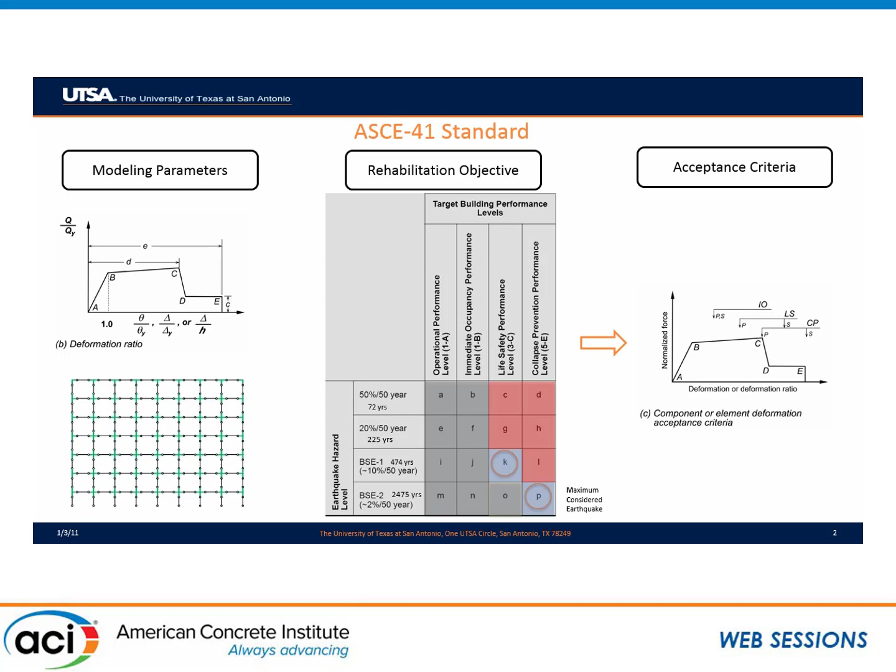We wanted to evaluate that, and the one methodology that is out there to evaluate seismic codes is FEMA P695. It's really not meant for rehabilitation, but it is a methodology that would allow us to approach this in a more objective and statistical fashion, because you're not doing it with a single ground motion. You have a suite of ground motions, and you can compare the results from near fault and far fault ground motion sets.

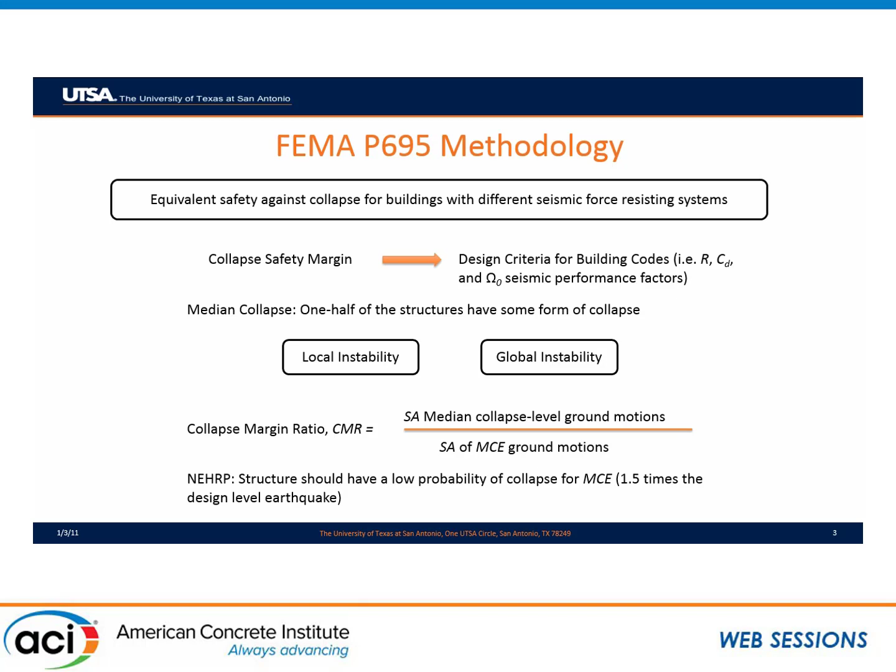Through this methodology, which is very different from ASCE-41, you subject your structure to a suite of ground motions. You figure out what ground motion causes collapse, and that gives you an idea of the collapse margin ratio for that particular structure. So we wanted to ask ourselves: if we take a building and model it using ASCE-41 methodologies, and then evaluate it with FEMA P695, what will that tell us about the probability of collapse of that building?

The natural choice was the Van Nuys Holiday Inn building, for a number of reasons. It's been instrumented, and there's a wide range of records for different intensity levels of shaking. It's advantageous because it has columns, spandrel beams in the perimeter frames, and slab-column connections in the interior frames. Our interest was in evaluating the system and how the nonlinearity is adjudicated between the different types of elements, so it was actually great that this building had many different types of elements in it.

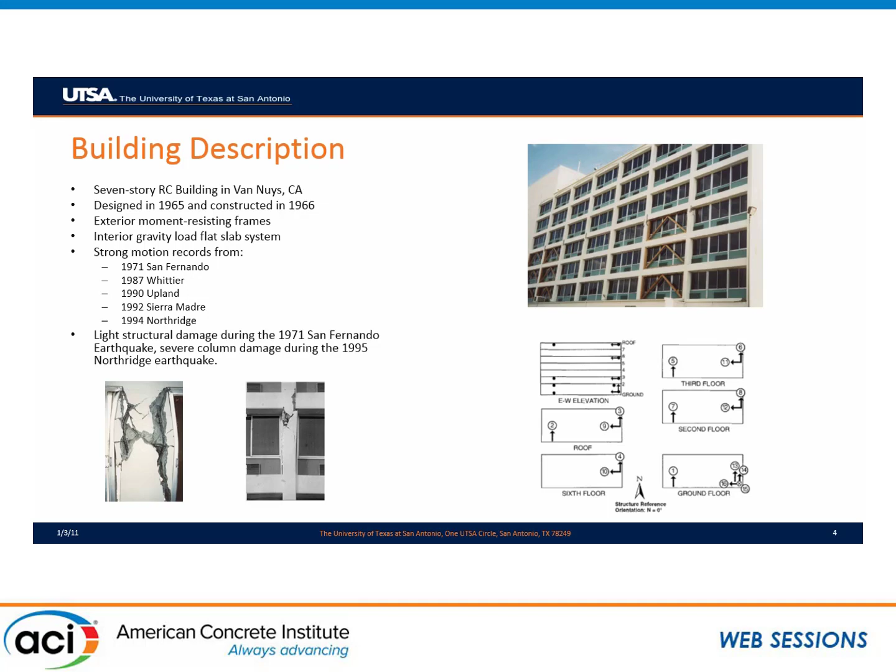As I was mentioning, today I'm just going to present results for the east-west direction, shown there in orange. As I said, the exterior frames have spandrel beams and columns, the interior frames have slab-column connections, and the interior of the building really is meant for gravity.

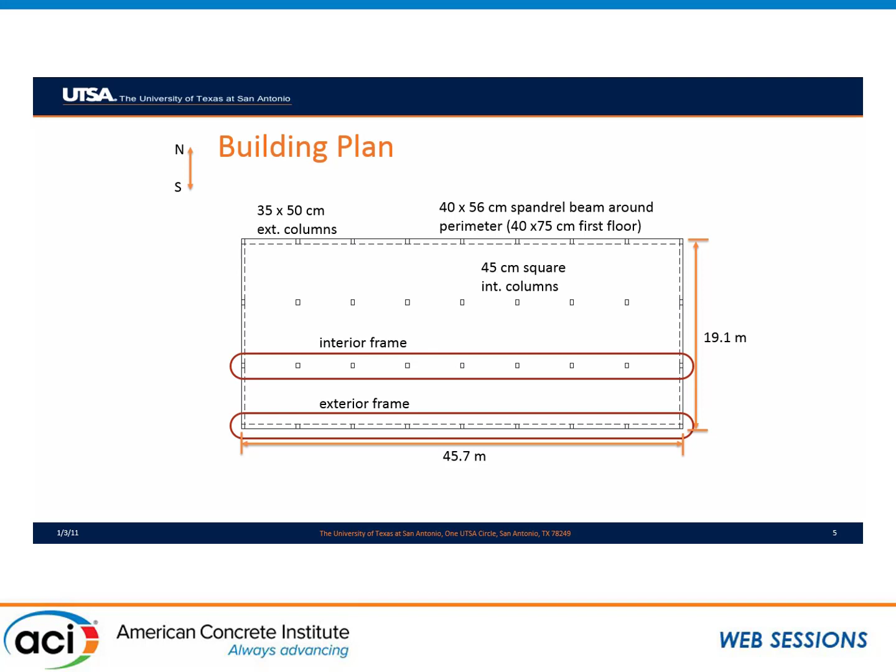In the results I'm presenting today, we're just taking advantage of symmetry and showing the results for two frames: the interior frame, which consists essentially of slab-column connections, and the exterior frame, which is a spandrel and column frame.

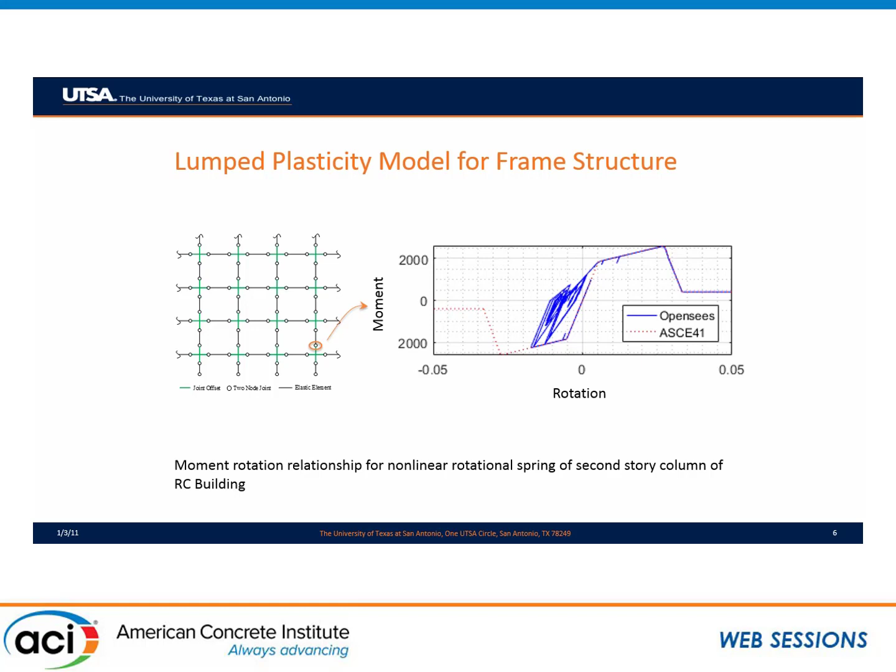So we used a zero-length plastic hinge model, in which we assign plastic hinges for columns and beams and slab columns, following the recommendations for modeling parameters in ASCE-41. The figure on the right shows a typical result from a nonlinear analysis simulation, where the red curve shows the envelope built using the ASCE-41 provisions, and the blue shows what the OpenSees analysis would indicate for a typical run following the simulation or the envelope curve.

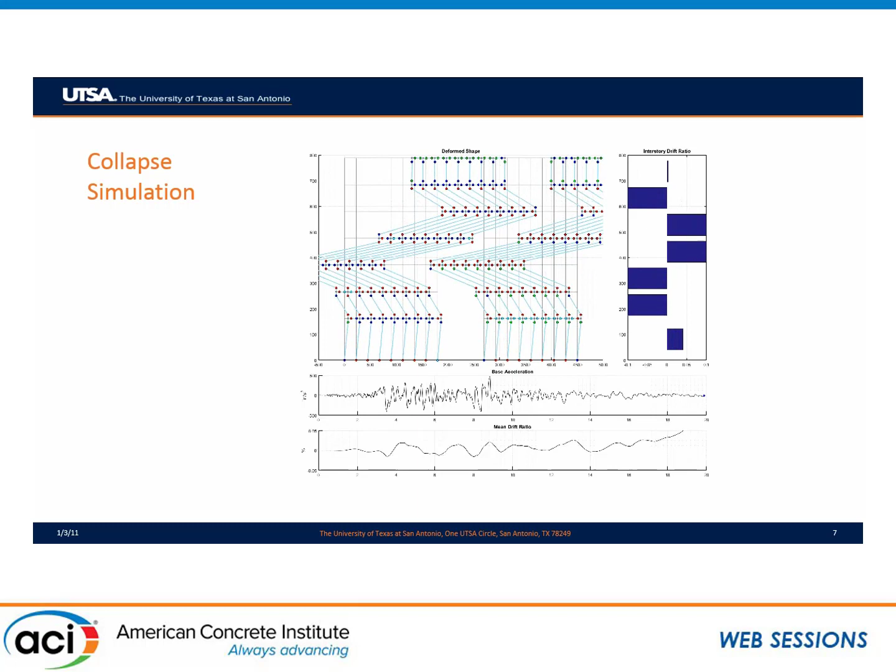Having done that, we did thousands of nonlinear analysis simulations. We tracked in each one - the hinges have different colors, similar to what Laura and Sun have shown - color-coded to show the level of damage: red is most severe, green is least severe. This particular simulation has been run to the point where the building collapses due to lateral instability. We do these types of simulations all the way up to where we reach this point, and we end up with a wealth of information for each of the earthquake ground motions that we run this for.

So as I was mentioning, we have a suite of 44 ground motions. Those ground motions we scale to MCE according to the P695 procedure. Fortunately for us, the MCE is about 1 G for the site of the building, so that makes the numbers really easy to interpret after the fact.

And for each of those earthquake ground motions, we do an incremental dynamic analysis where we extract the condition of every hinge for each of the nonlinear simulations.

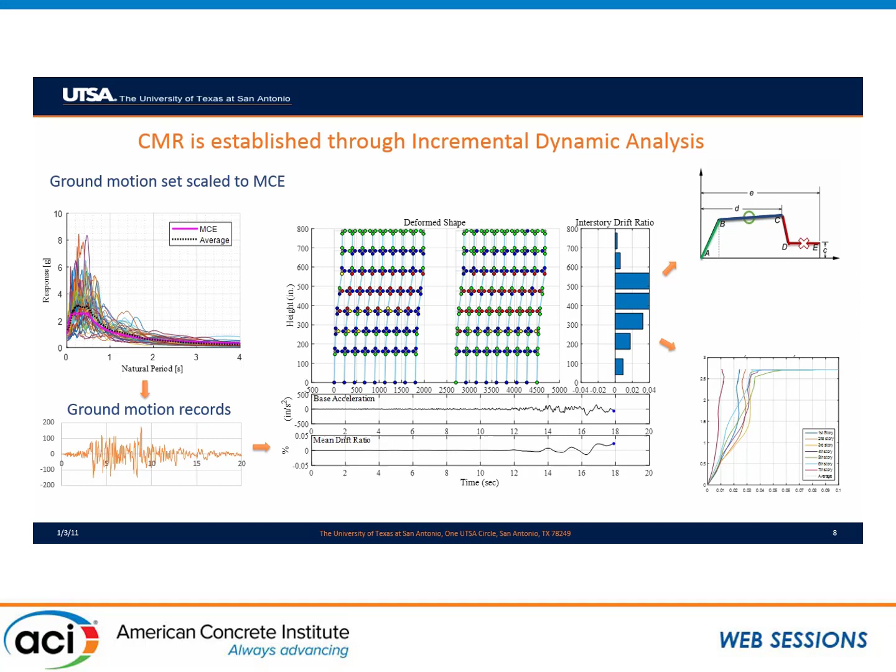Typically, you would end up with curves like these. This is a very brittle building, so you would have a fairly stiff response until the instability hits the building. The columns or the slab column connections are very brittle, and so you get all of a sudden a very flat response. And actually, that's a part that it is quite hard to simulate. It took us a lot of time to be able to get to that point.

So when we look at the results, again, this is done in a statistical way. We aggregated all these analyses to develop fragility curves.

And so when we look at the overall response of the building in terms of lateral instability, and this is a somewhat flawed analysis, because what we do is we allow elements to remain past the point where they lose axial capacity. They just keep going on toward the right with zero stiffness.

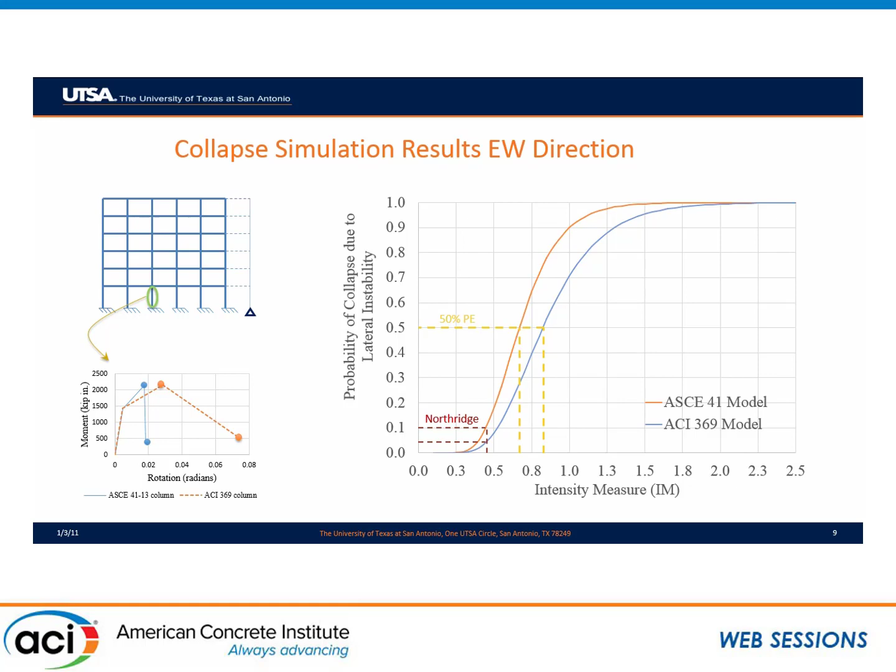On the red side is what we see with Northridge. I think these curves are interesting in of itself because it gives an idea of what these codes are saying is the probability of collapse of the building. And what I would like to remark about Northridge is these simulations tell us that the probability of collapse under the Northridge earthquake for this building are fairly low, or a ground motion with the intensity of the Northridge earthquake.

We looked at the same comparison in terms of acceptance criteria. This is a more restrictive evaluation because acceptance criteria are tied to element behavior, so you can get collapse of the building because one of the columns cannot carry axial load anymore.

In brittle buildings like the Holiday Inn, this is going to happen before the building reaches lateral instability. So you see the probabilities of collapse drop, and so whereas before we were talking about 75% or 85% of MCE to reach a 50% probability of exceedance, here these are much lower. They're in the range of the 50 and 60%.

We see the same pattern though when we look at acceptance criteria for columns, is that when we change from 13 to 17, the intensity measures associated with collapse went up, or the probabilities of exceeding went down. The building is less likely to collapse due to column failure under the 17 provisions, than under the 13 provisions.

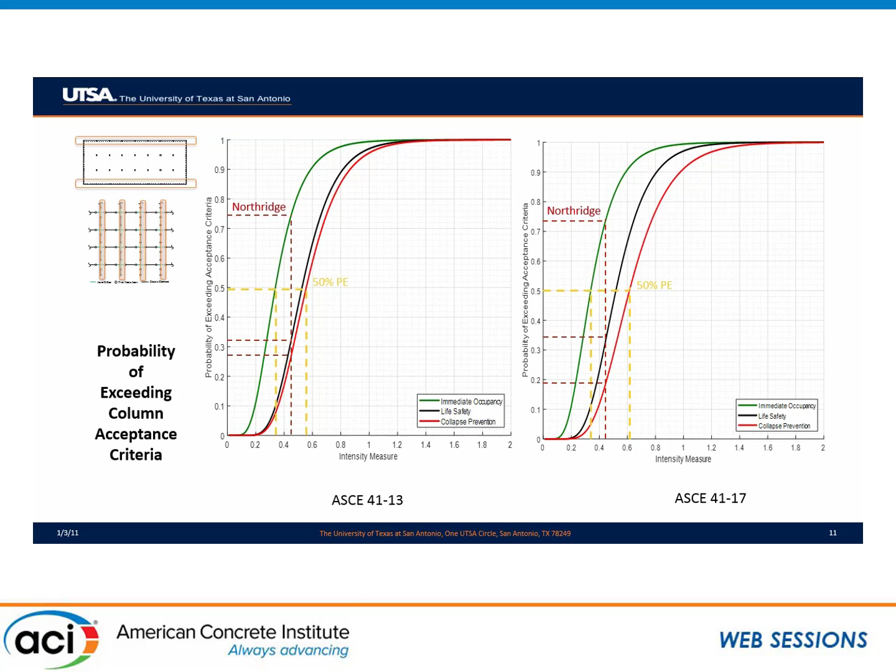The one slide that really got our attention is, we get column acceptance criteria. Let me just cut to the chase. Is this one.

This shows a comparison between what happens in the columns versus what happened in the beams. So the graph on the left, this is again in terms of acceptance criteria, shows fragility curves for the 13 and 17 editions of ASCE-41. And so our columns move slightly to the right, meaning the larger deformation capacity of the columns meant that if we judge the building on the basis of the columns, then things got better, got slightly better.

We're still at about 60% of MCE, so it would mean that for the Northridge earthquake, we were really close to collapse, but not quite there, which is about right for this building. I think that means the ASCE-41 is providing a very decent assessment of what's happening in the building.

Now, what's somewhat alarming to us is the fact that if you look at the beams, the curves went in the other direction and moved over to the left. And so that means the probability of reaching severely damaged states in the beams went up as a result of the change in the provisions.

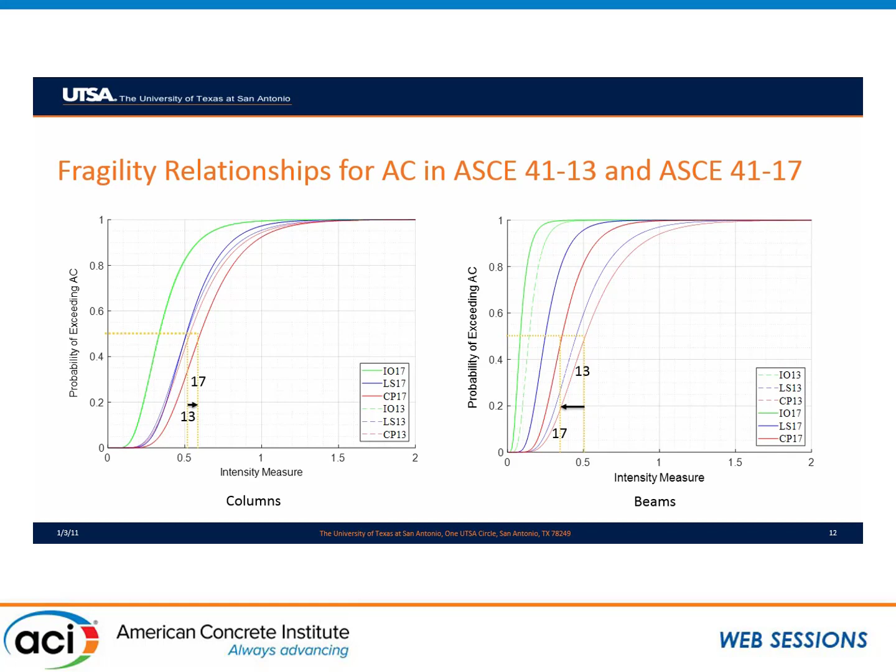We reallocated the damage from the columns to the beams, and the beams are not that important, but perhaps we should all be most concerned about the slab-column connections in the interior, which, if you make your columns stronger, then your slab-column connections are the ones that are going to begin to control the collapse capacity of the building. Having seen that, this is one of the efforts we're going to talk about later when we discuss ASCE-41 and what we're doing in the next code cycle.

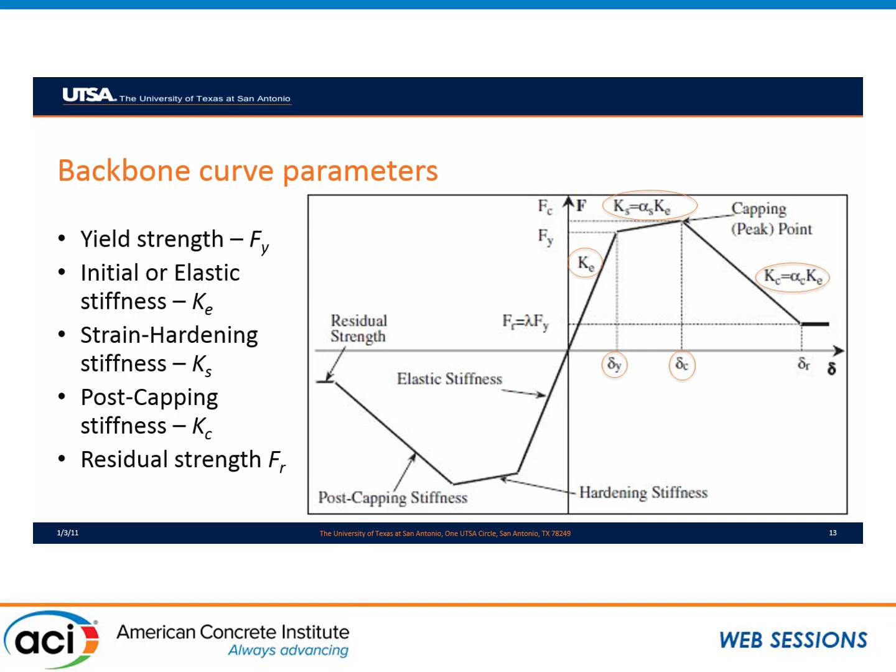We went and looked at test data, trying to look at those parameters for beams. I'm going to show a couple very quickly. For example, one of the critical points in the response of these collapse analyses is point C, where we lose lateral load carrying capacity, and that has a profound effect on when the building begins to become unstable.

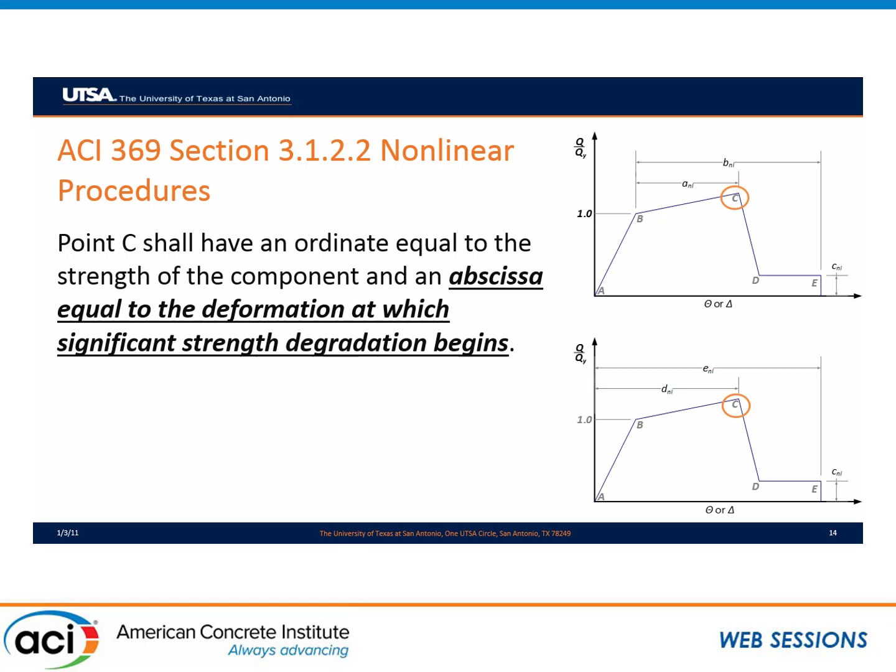We looked at a group of tests performed with elements with low axial load to zero axial load. The log normal distribution shows the distribution of that particular point, where we trace the backbone relationship and the point where there was loss of lateral strength. On the horizontal axis we have the drift ratio, and on the vertical axis we have the cumulative occurrence of that particular drift ratio.

I have two boxes, one orange and one blue, that correspond to values in ASCE-41 as they are today. If we're really attempting to portray the mean response of beams, we would like those two boxes to occupy most of this graph—wider, and centered around the 50% case, which is a drift ratio of approximately 4%.

Right now ASCE-41 has two categories of beams, compliant and non-compliant. For non-compliant beams, the values in ASCE-41 range between 5 and 27% drift ratio for lateral load loss in this data set. For compliant beams, the range is between 16 and 40%. These numbers are extremely conservative, and inconsistent with what we have today for columns, where we'd be tracking at approximately 50%.

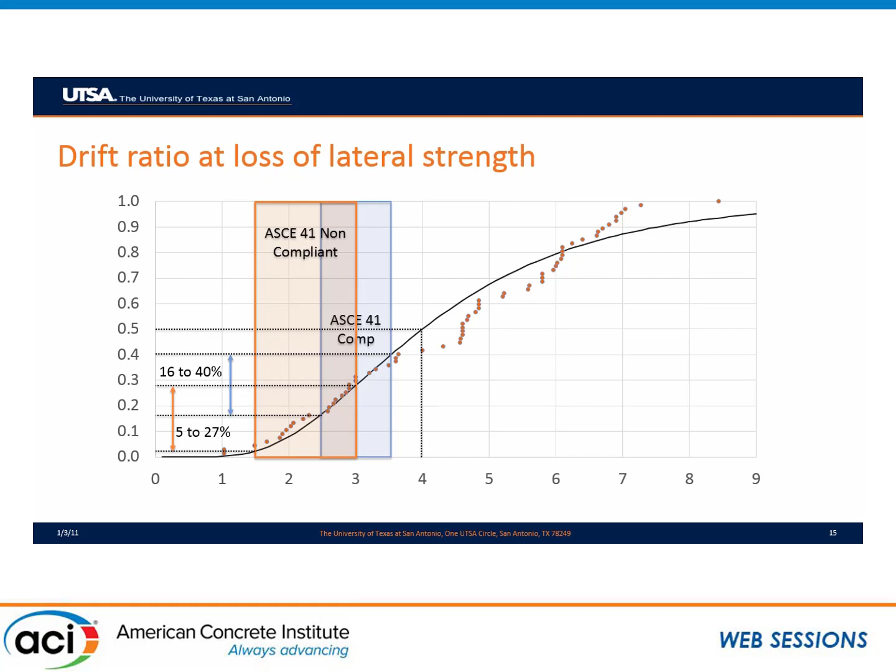We did a similar comparison for the descending slope. Here it becomes more difficult because the number of data points is smaller and the scatter grows significantly. We've done work at UTSA trying to define this parameter for columns, and our results are consistent—we see the scatter increase. It becomes harder to define this, whereas other points can be defined much more precisely. But the idea is the same: the larger the number, the steeper the slope.

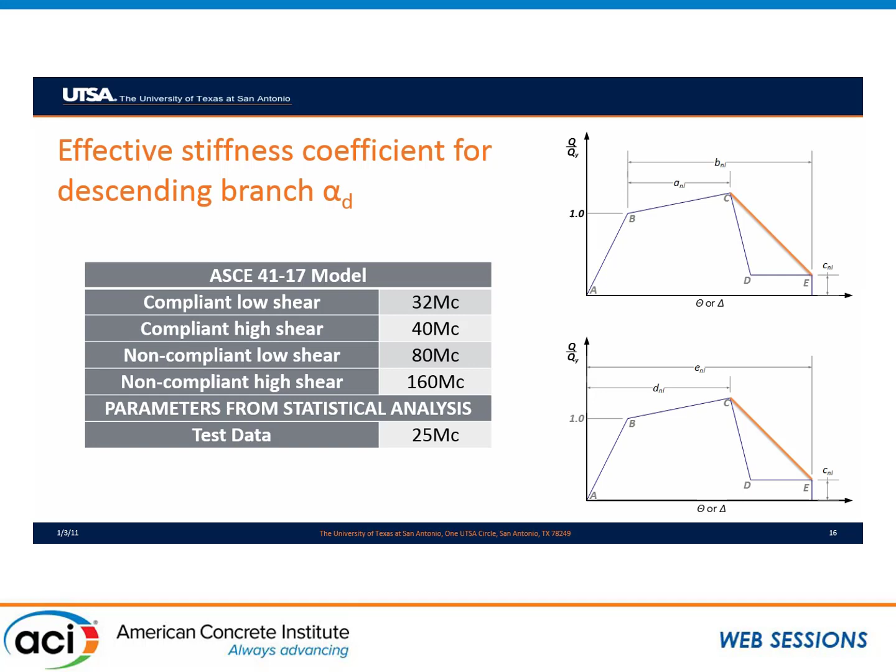What you see is that based on parameters B and C, or E and D of the ASCE-41 provisions, you get much steeper slopes than you get based on test data. So not only are we estimating the corner in a very conservative way, but this slope is being estimated much steeper than we see from the test results. All of that is contributing to the fact that we're introducing bias in our nonlinear analysis.

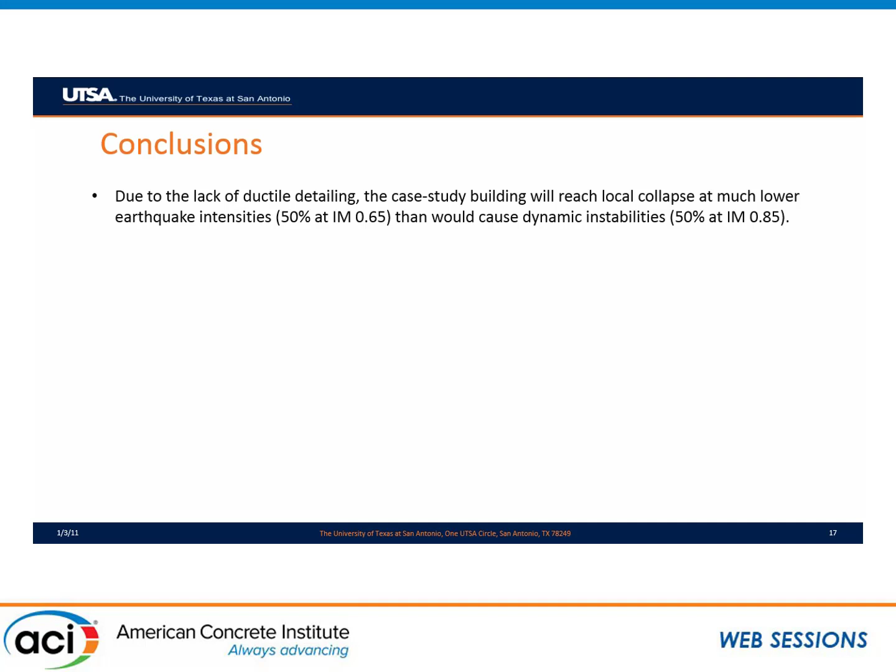So to conclude, this particular building is a brittle building, and we reach collapse controlled by the elements—it's not controlled by lateral instability. That happens at much lower intensities than it would for lateral instability. So we think, on the basis of this analysis, that a building like this will experience collapse due to local element failure around 60% of the MCE.

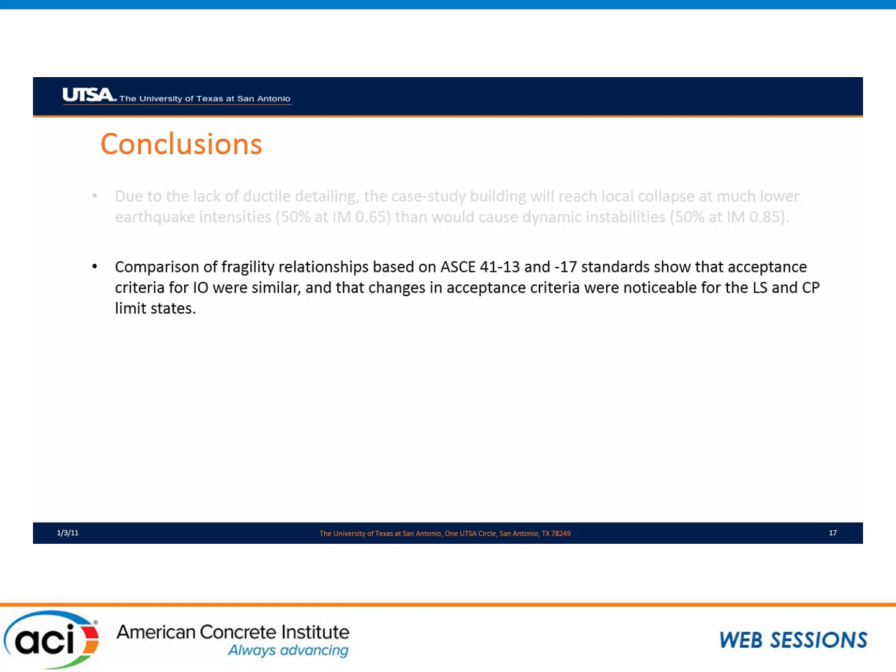In terms of columns, the fragilities between ASCE-41-13 and ASCE-41-17 show similarities, with a slight increase in the collapse prevention limit state for the columns. That's in no small part because the greatest difference introduced was at point E, where we had loss of axial load capacity. This is a personal opinion, but I think it's better to have a greater gap between LS and CP, so I see this as an improvement, and more consistent with what you might expect from the different performance levels defined in ASCE-41.

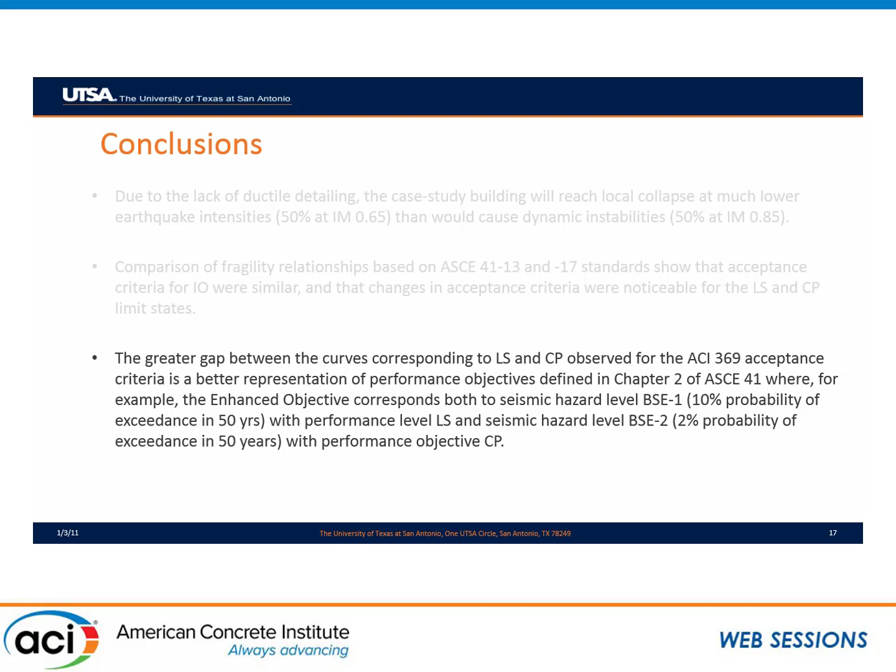The performance—and I should make a small correction—is controlled by beams. Beams in that case can be an interior slab-column connection or an exterior spandrel; we made no difference in the results we showed you today. If it's a case where the building is controlled by a beam, we can't tell an engineer with a straight face that they need to retrofit their building because their beams are doing badly. So I think we need to reflect that in how the assessment methodology is implemented.

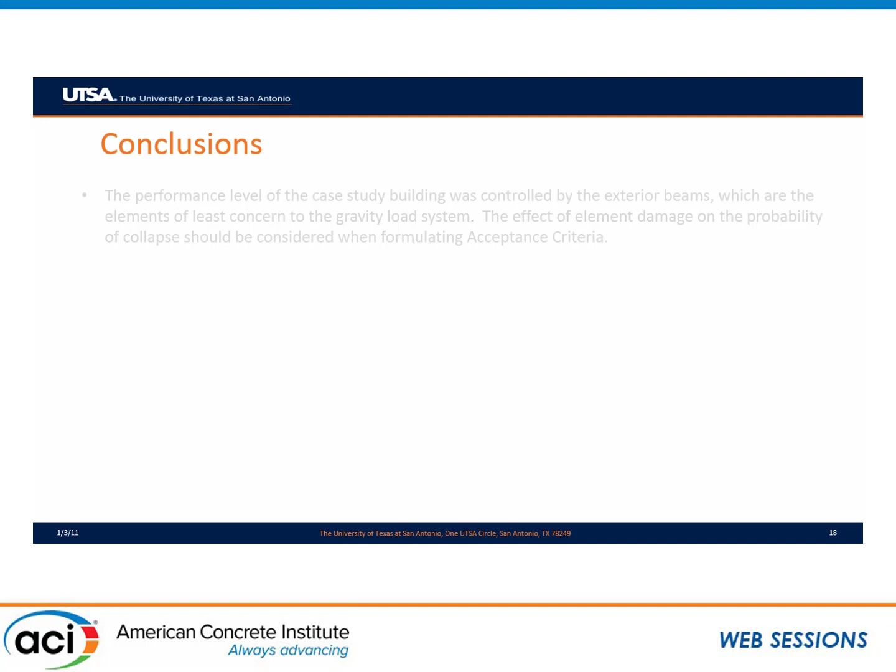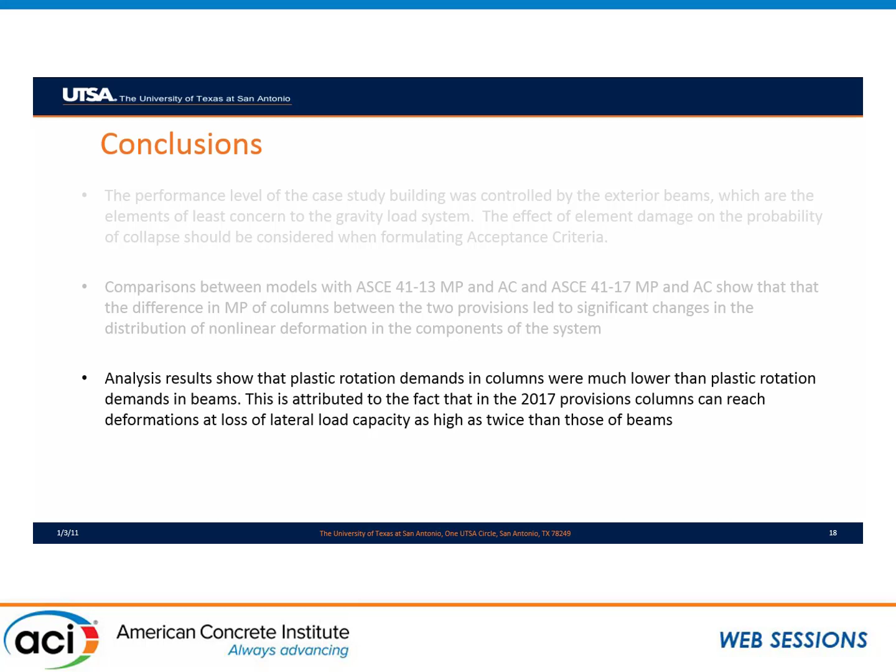Again, it's clear from the curves that the changes between 13 and 17 lead to profound changes in the probabilities of collapse of the building and the distribution of nonlinear results. That's particularly a concern in the 2017 provisions, because all the nonlinearity went to the beams, and we actually saw reductions in the demands on the columns.

So that's something that is, again, food for thought, and I think it's driving the efforts in ACI 369 now to update all of these element modeling parameters, so we can obtain a more objective measure of how the damage is allocated within these buildings. There you go.